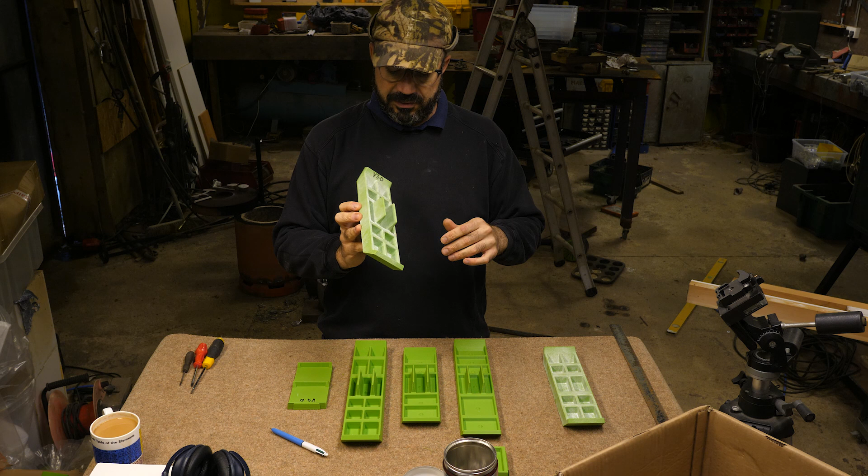I'll show you that in a sec. But just a tiny recap. So the last thing you saw was me casting version 3. If you remember, it was pretty nice, but there was a bow and I was trying to get rid of that.

It had finally dawned on me that these ribs were really just for the PLA model and not the aluminium part. So after that video, I started to think in terms of reducing the ribs altogether, particularly these ones. Do you remember I was going to make these thinner as well, like the version before was? I was going to try and reduce the height of everything.

I really just wanted to almost get rid of everything and just get down to a flat plate, because that would help a lot with the bowing aspect of it. So I went straight to version 4, which actually sits here.

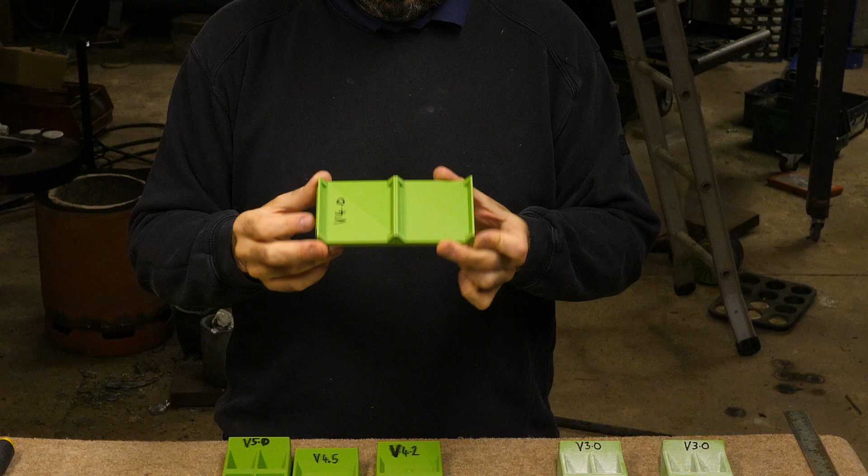Now version 4 is essentially a flat plate, and I redesigned the tapered dovetails to be super small. They're only half the height of the tapered dovetails in this version. I was kind of pleased, I thought actually there's promise to this.

I printed some, and unfortunately when they go together you can see there's a significant bow at the join, and I think this is due to the dovetail being a little bit too small.

But I was thinking at the time that perhaps it's because these ribs here, I'd done away with them, and really the only thing stopping it bending this way was these tiny little 45 degrees here. So I binned that one and reprinted it with the same small dovetail, but with ribs in between.

It did help things significantly. As you can see, the bow is a lot less. It's still there though, and it was getting annoying now because I didn't really want to start with a pattern that had a bow in it.

Because then the very best I could hope for is a part that would have a bow in it, and I didn't want to rely on using force to bend things back into the right place. I just wanted to have a pattern that was straight and flat, much like these ones were. I was just trying to reduce this but get the same flatness.

And unfortunately version 4.2 didn't cut it, which was a real shame. So that led on to version 4.5, and that is essentially the same except taller again. And unfortunately it's still got a bow, and I was then starting to think, okay, it's the tapered dovetail, it's not the ribs.

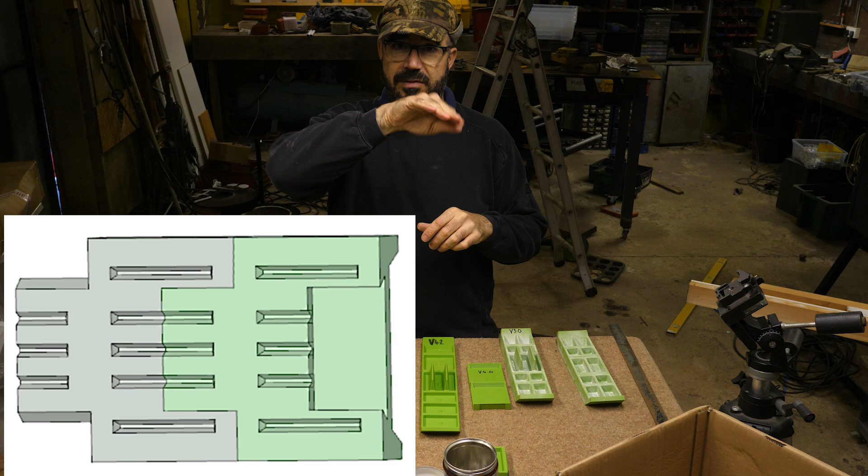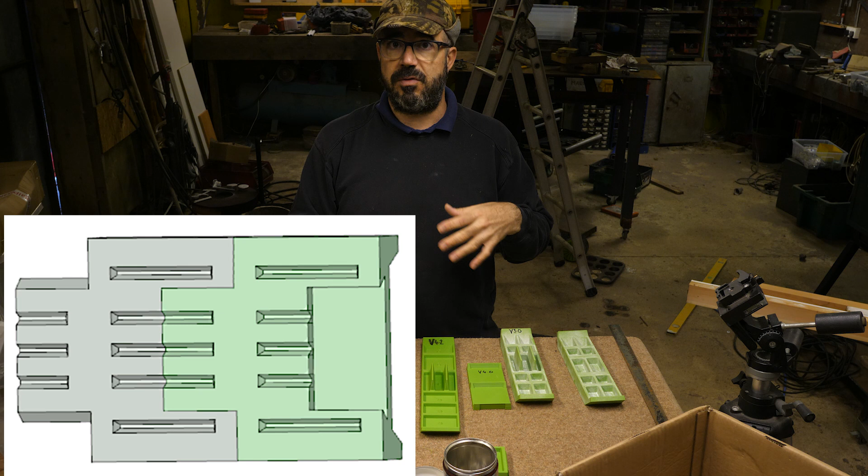I fired him back an email saying, this looks amazing, but it's got an overhang of 90 degrees. Essentially, the male slot has got a long shelf that has to be printed above the print bed, basically a large bridge, with nothing beneath it to support it. During this whole project, one of the major things I wanted to achieve was to make it easy to print. Because on the best of days, sometimes I have terrible prints come out of my printer, and I really want to avoid supports at all costs, which means avoiding 90-degree overhangs.

I basically said, that looks amazing, my one doubt is that 90-degree overhang. Leave it with me, I'll think about it for the next couple of days, and if we can get over that, this could be the new way forward.

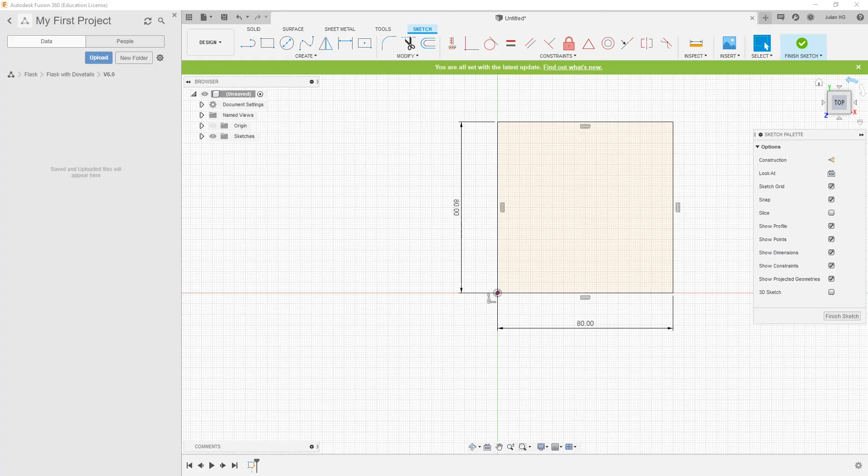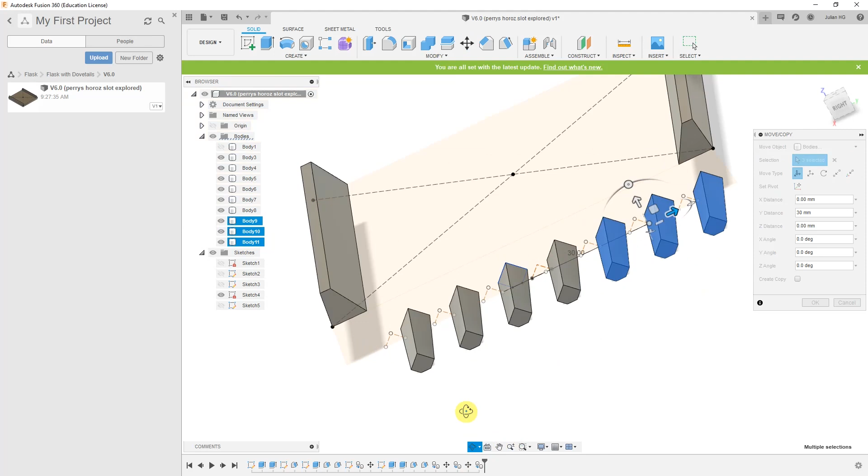Within 10 minutes, I basically sent him an email saying, I think I got it. My idea was to take Perry's idea, which was incredible, and split that long shelf. Instead of having one shelf going above another shelf, my idea was to split them into fingers, with the male fingers moving into the female fingers. But if I was cunning enough, I could make each finger based on a triangle with sides of 45 degrees, which is totally easy for a 3D printer to do.

It's when you get to 90 degrees or flat that the overhangs are a nightmare. Printing a triangle at 45 degrees is dead easy for a 3D printer because it's always printing onto the bit below it. It's just slightly off to the side, and as it goes, it just works its way up, and it's a perfect 45 degrees.

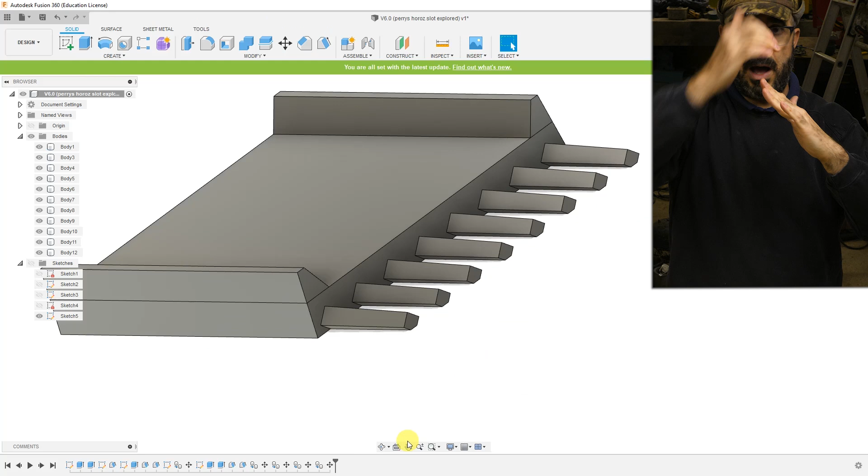So that was the new plan. I spent the next 4 hours feverishly designing. These fingers are based on triangles. They're actually kind of square in section, but they start thin and get wide, so that the 3D printer's always got something stuck on the bed.

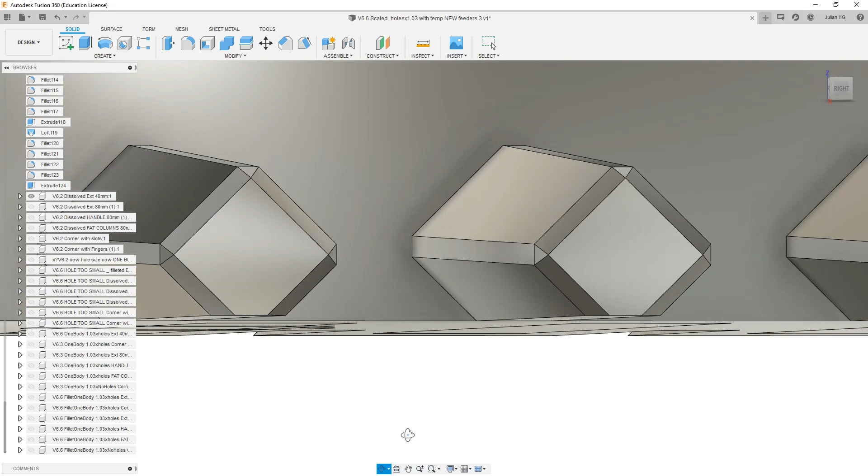With that square shape on its end, a kind of diamond shape, this side, the female side, is also printed with a 45-degree overhang as well. Nothing over 45 - I think it might go to about 47 when I include certain things I'll talk about in a minute, but it's nothing like 90. 90 has to be avoided at all costs. I'll show you these in close-up because they're kind of neat.

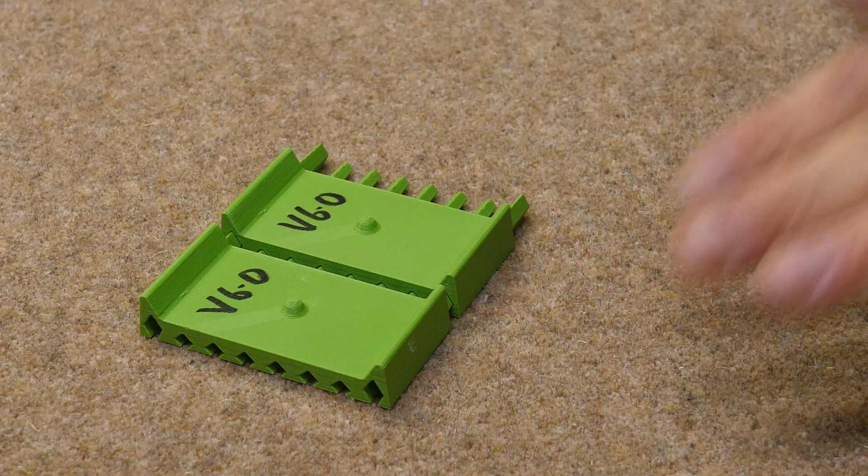So this was my first take on Perry's slot idea. Instead of the slot along the bottom, all I've done essentially is remove half the slot in vertical segments and then change the shape of each slot, and on the other side have the fingers fitting into a female version of the fingers.

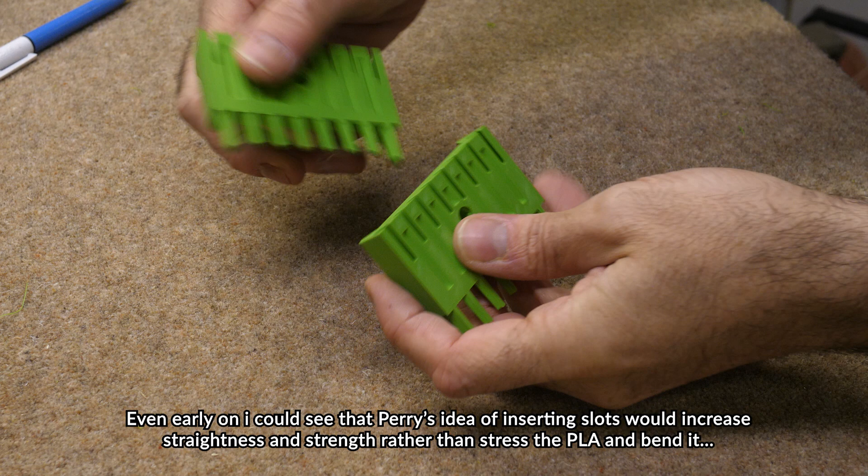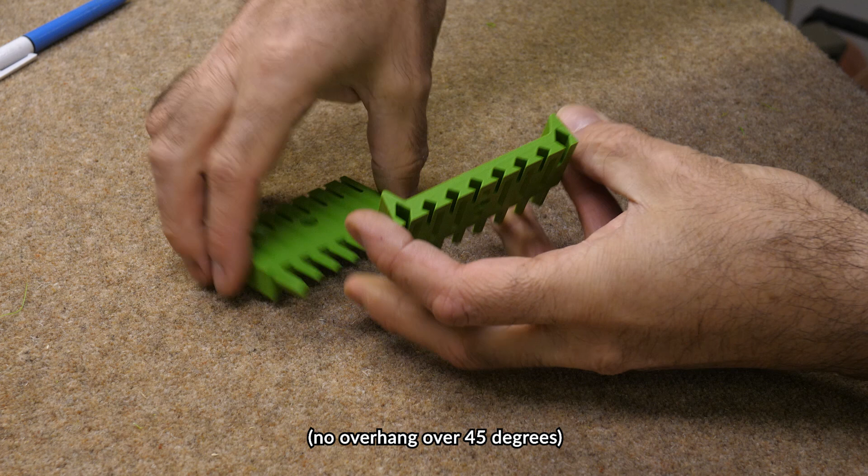Now, as you can see, if you look underneath, both the hole parts and the finger parts always start on the print bed. There is no part with an overhang, and when I first got these off the printer, I was so super excited. I was emailing Perry going, oh my God, Perry, if this works, this could be incredible. And I put them together.

At the moment, this hole is exactly the same size as these fingers. Bear in mind that I printed this at 0.2 millimeters in fast mode, so that is the least accurate setting my printer can go. There is one setting worse, but I never use it unless I'm in a massive rush and tolerances don't matter. But tolerances do matter with this. Oh, one other thing I forgot to mention.

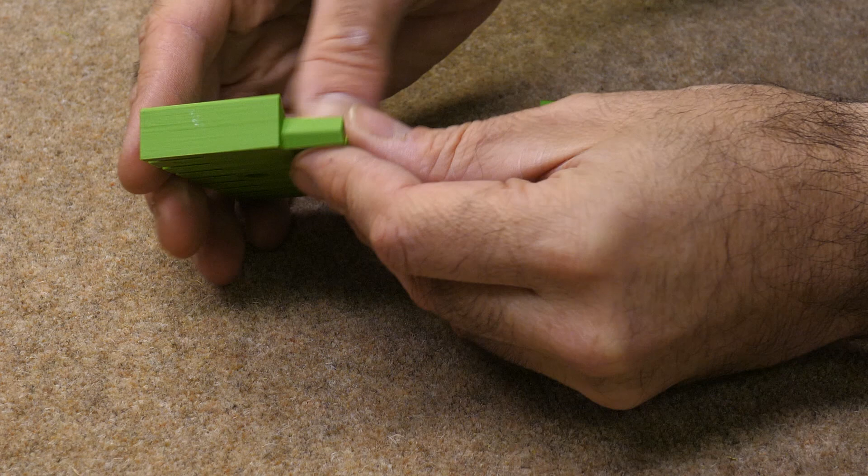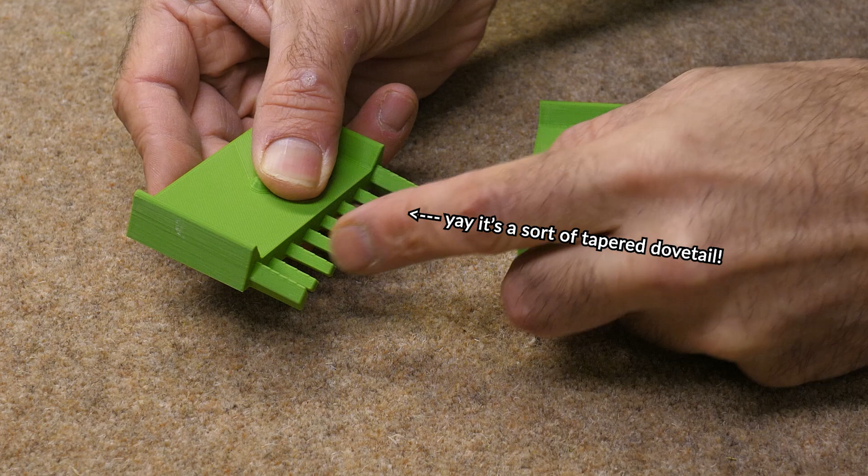It isn't just a basic diamond or square. If you look side on, it's flat along the bottom because it has to be on the print bed, but I've tapered it along the top surface. I've actually put draft on the top two surfaces.

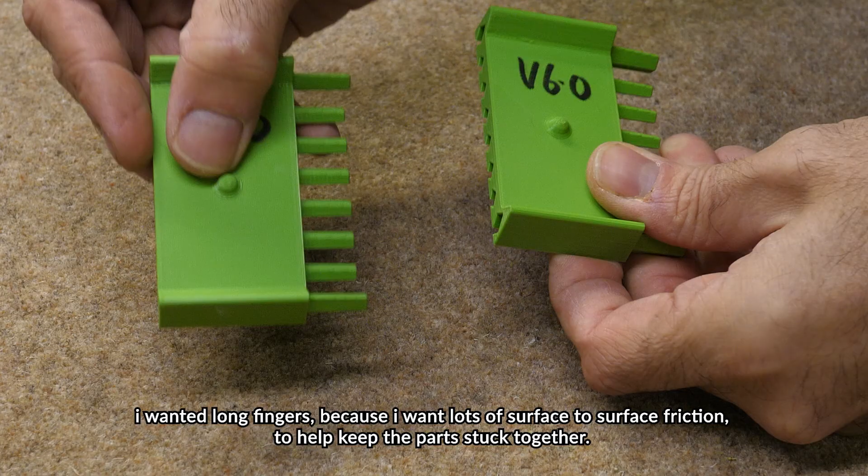The bottom two surfaces are exactly 45s, but the top two surfaces are tapered down, and that way it's not a firm fit until you actually get the parts fairly close together, because I was worried that because the fingers are fairly long they would snap off inside the other part and it would be a nightmare to separate. So I made the wedge in order to circumvent that.

Anyway, so I got them off the print bed, put them together, and was ready for a little celebration.

So I'm pushing pretty hard there. I don't want to push with all my strength because I'll never separate them. But as you can see, there's a 3mm gap. So that's not great. But if you look down, they are absolutely dead straight. So I was well chuffed. This could be the new way forward.

And I was thinking, wow, this is pretty amazing. Lovely and straight down there. But you may not notice on camera, there's a very slight thing you may not see.

This piece here, the male piece, is on a slightly different level to the female piece. The male piece is like 0.1 of a millimeter above the female piece. And that is because of the way they're printed - these holes, the bottoms of the holes are just slightly too small. I think it's all to do with the first layer squishing, it's called the elephant foot effect.

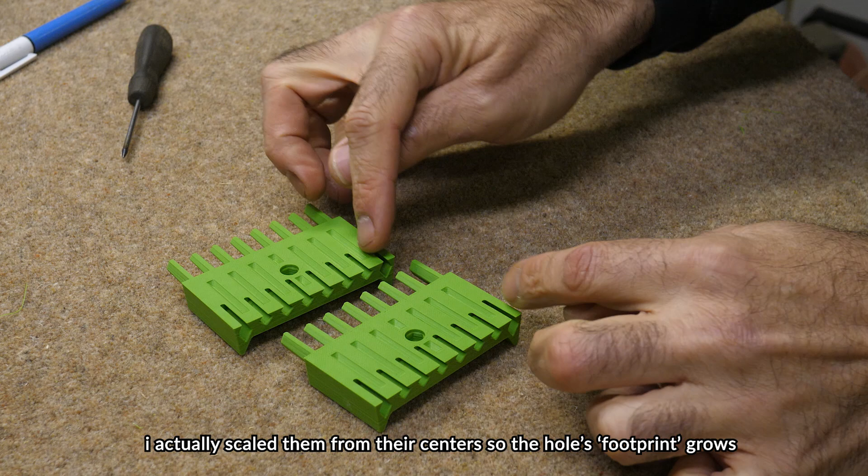But what I had to do was make these holes bigger. All I did was scale the holes by 5% and made them bigger. So I kept the male parts the same, but the female holes I scaled 5% bigger. And then I did a reprint.

And that's what this is. But it's nearly perfect - I mean, I say nearly, it is perfect, but I would call that a tiny bit too loose. I wanted them to hold together a little bit more firmly. So I redid it again, but instead of a 5% increase in the hole, I went to a 3% increase in the hole. And that is where we're at now.

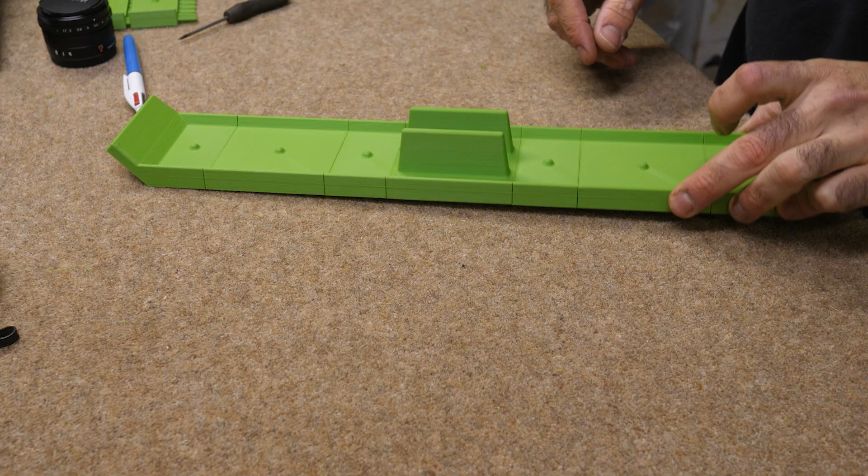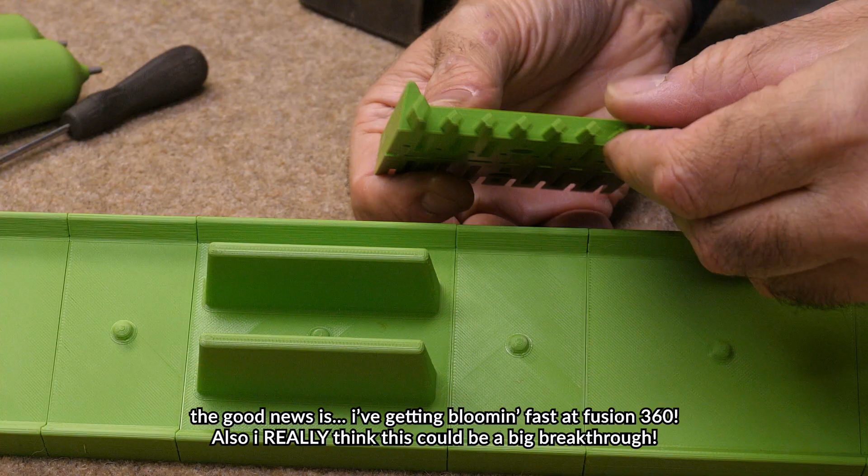Because of that amazing photo that Perry sent me, and the subsequent complete redesign of the whole thing with the slot turning into fingers, it's essentially the same, except instead of one big slot that has got a 90-degree overhang, which I didn't want to do because of printing problems, I turned it into 8 fingers, which will all print really well because they're all on the print bed.

Equally, 8 holes, which will also print well because they're all supported on the print bed. And because of that idea, essentially, we've done away with these fat columns that were having to house the tapered dovetail. And I think those fat columns were the ones causing it to bend.

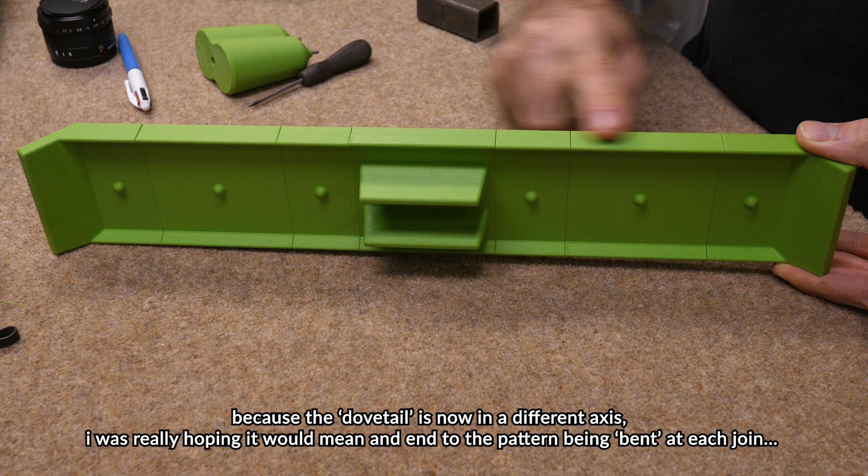It may well be that these ribs cause a problem. I like the idea of having a largish flat surface here for your kind of striking tool to rest on. There is taper there, it's 7 degrees. And again, I've gone with 7 degrees taper on the handle.

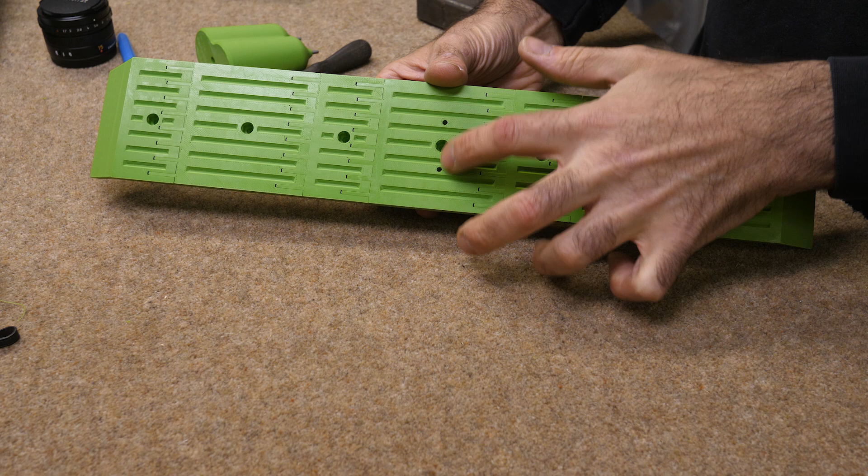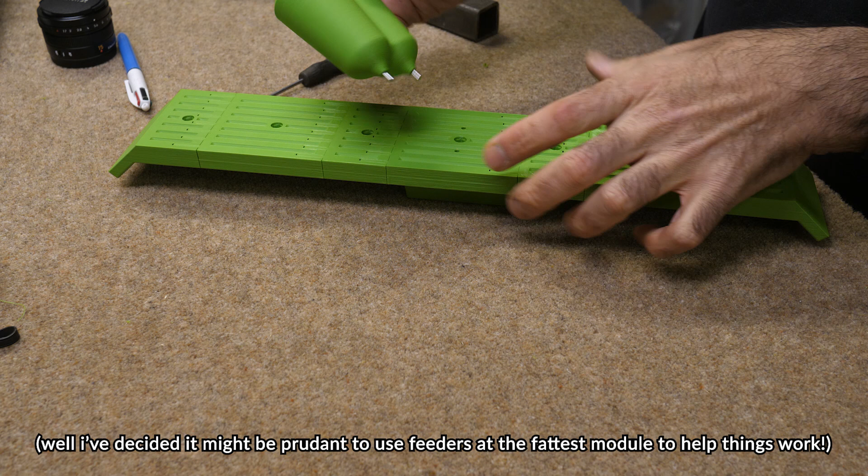You can see the bumps where the captive nut holes are. There's also, I've added on these 2 handle pieces, because I'm trying to use feeders now, I've added 2 little pinholes which will line up with this feeder pattern, and that will fit in there.

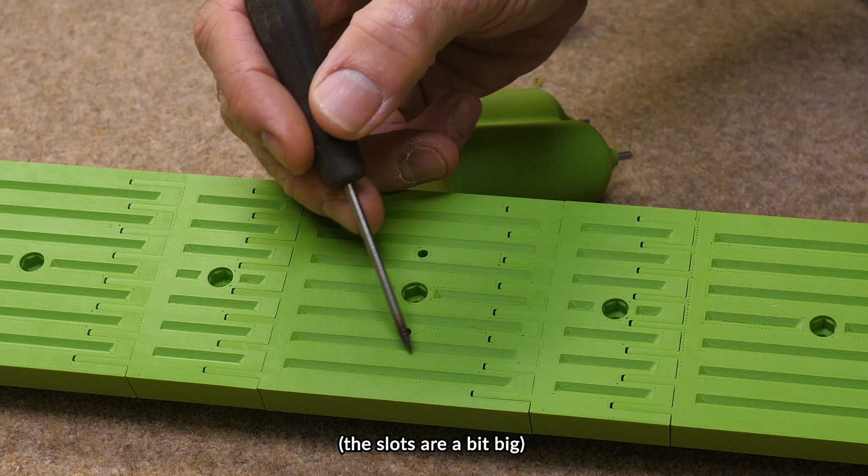Now unfortunately, because I've reused the slots from previous prototypes, they might be a bit big. Well, they are, in the way I've laid them out here. I may actually have to do what I did with these little nut holes and end the slots early, so that at the moment this flat piece here is too small, I think.

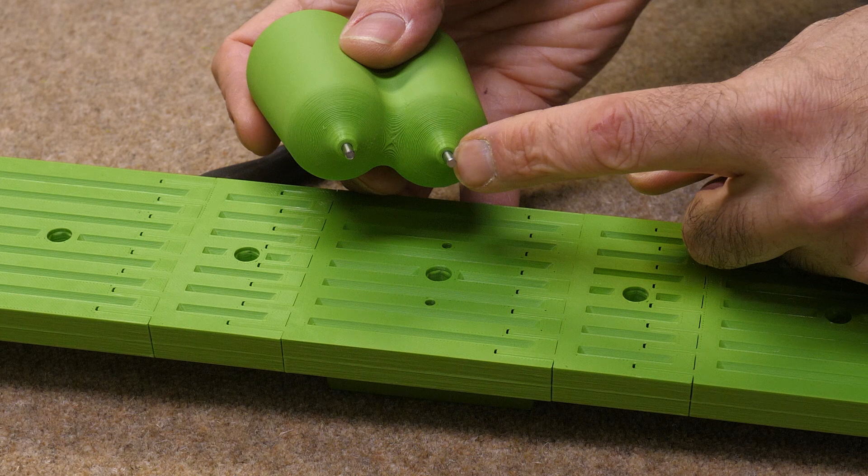The largest I can make that little feeder gate is only 6mm because of these slots on either side. If this has promise when I first cast it, then I will make these slots smaller in this area, and that way I can make the feeder gates larger if needed.

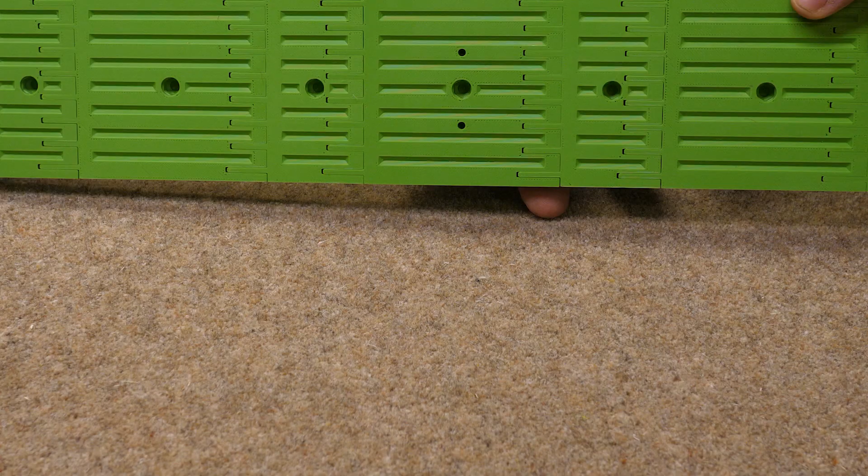So that's the standard handle module with its associated feeder part. Now, do you remember before, I've also made a module, like on the previous versions, that was based on one extension piece but with 2 fat columns on it.

Let me use this as a way of showing you how easy it is to dismantle the parts and reassemble them. So you have to be a little bit more gentle. It's slightly less positive than the tapered dovetails, but nonetheless, it is perfectly doable. So there we go, I took that one out. Let's put that one in.

There we go, so that's the fat column module put in instead of the other handle. And as you can see, it is dead flat still.

This is the module I was thinking would be useful if you wanted to make your own handle design and just bolt it straight onto this module. These fat columns give you a nice place to drill through. You could put screw threads in it or just bolt all the way through to the back. It's a bit more beefy and a bit stronger.

But because they're fat columns, and previously the fat columns have caused us bending issues, I put two little feeder alignment holes right in the middle of these columns. And here's another double feeder unit that will just fit on top of that.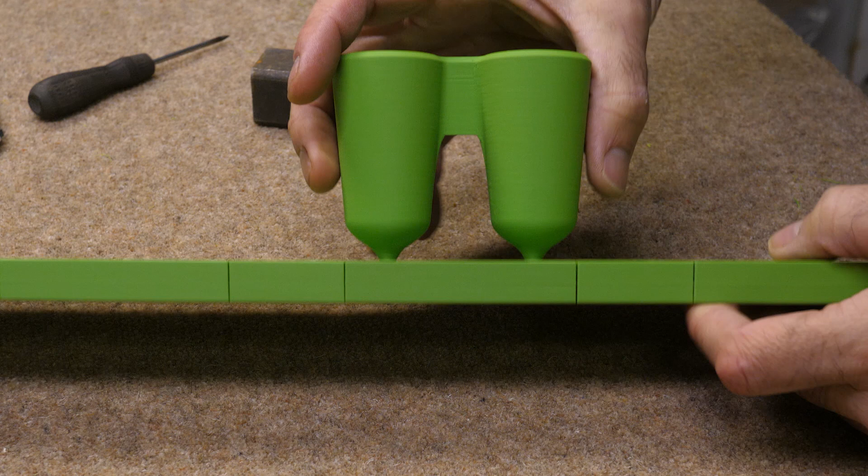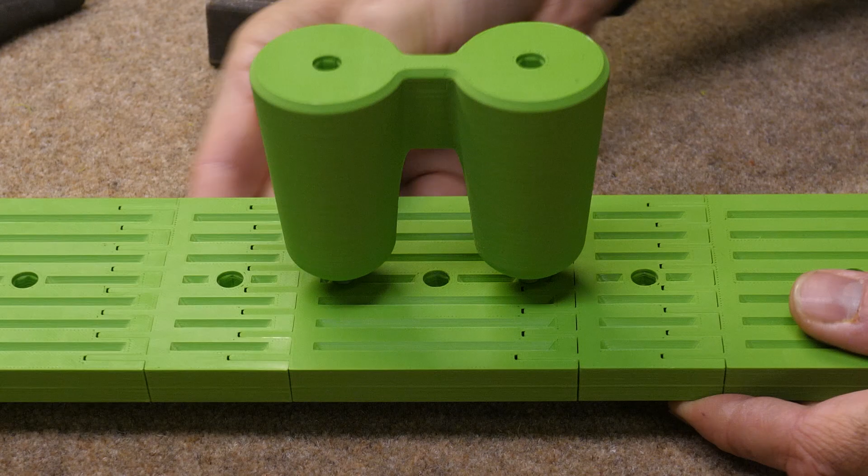But again, the gate is probably a little small, but we're going to go for it this time around. So that's where we're at.

Oh, another bit of news. Late last night, I was in bed, actually waiting for these to finish printing, and I had an email from Wargrade, another casting channel, Andy, and he's a great guy. He sent me an email about these flasks and said, don't be frightened of going thin. And I think I'm with him on that.

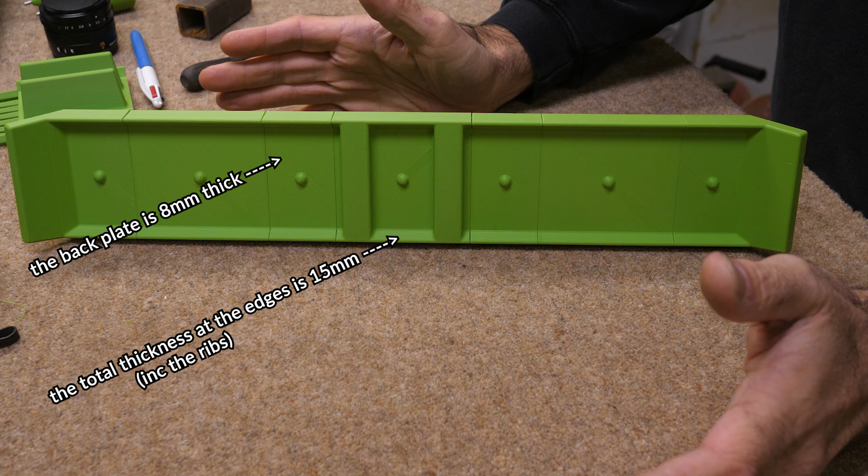This plate is 8mm thick at the moment with these ribs. It may well be, if this casts well - bear in mind this kind of ridge here may cause us problems with bending - but assuming it isn't, we could reduce the height even further.

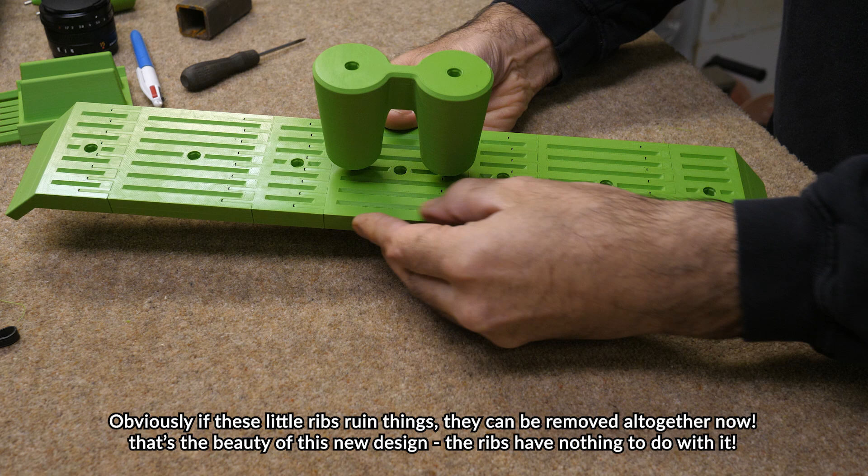Now I went with 8mm because I'm still using 4mm grooves in the bottom here, and I didn't want to go too thin without changing the grooves. I just didn't want to change everything all at once. So I went with 8 to start with, but that gives 8mm for the wings, which is probably thin enough.

Probably don't want to go too much thinner with the wings, but we'll see, because I might need a little bit of allowance to do some sanding once the parts are together, and if they're super thin, you won't be able to take off much with a sander.

Oh, and one other thing Wargrade said - then I scrolled to the bottom of the email and saw this photo. And as you can see, potentially, that is an awesome idea.

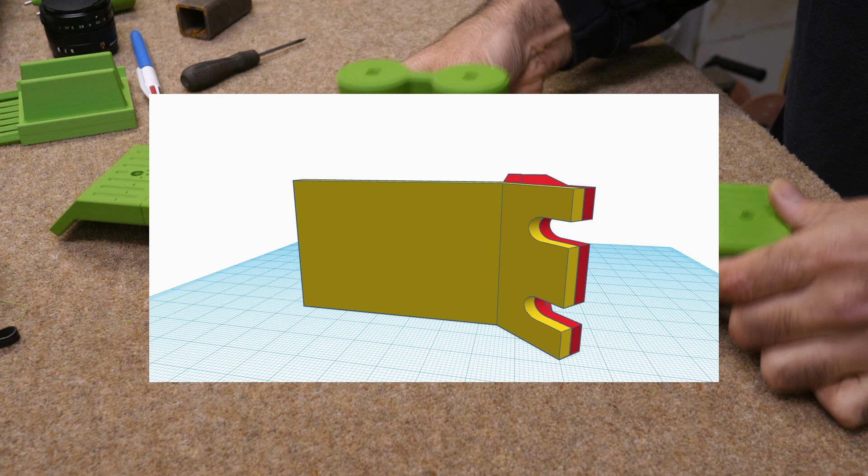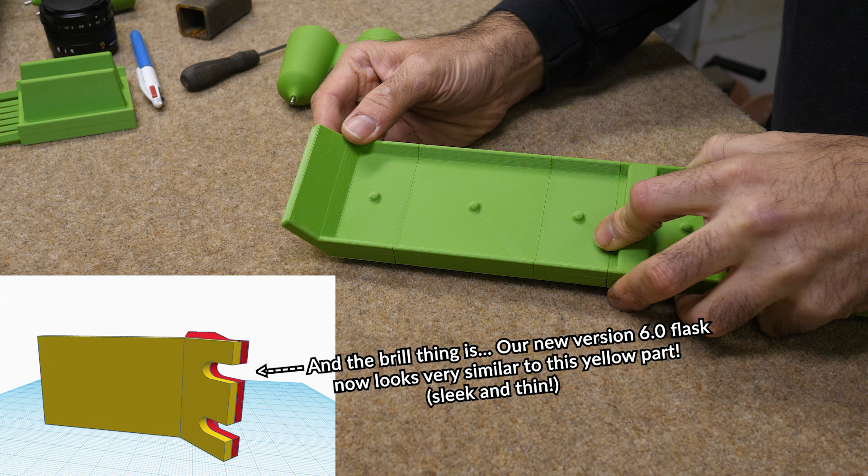I think if I can somehow automatically cast in sort of slots on the edges of these wings, that might be a nice time-saving idea.

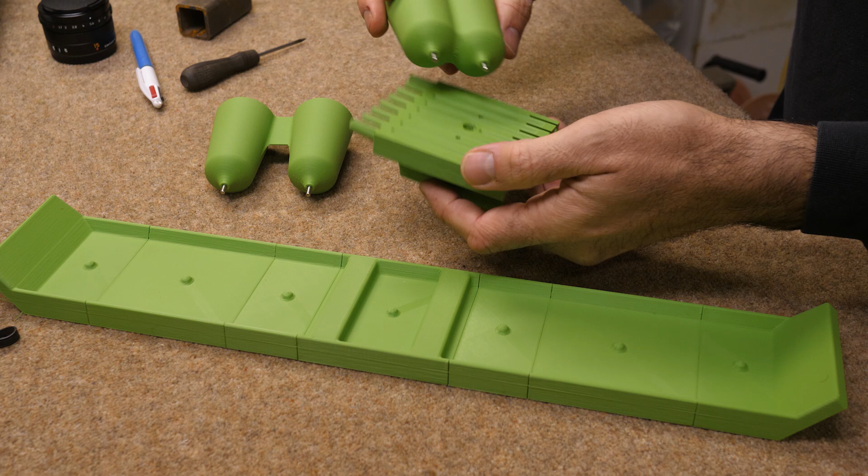I'm going to go with this first. I'll probably cast - I'm actually printing a few more bits now on the printer - and by the time I do some casting, which might be in the next couple of days, I'll hopefully have enough to do a small side with this module in the middle, and alongside another small side with this in the middle. So I'll be able to do two, and try out both feeder styles. So you got this one and this one.

Yeah, and that's where we're at now. So there are plenty of new avenues to explore. You guys, as per usual, are coming up with the goods. This one mainly is about Perry and Wargrade, but if it hadn't been for every other suggestion before that, we wouldn't have got this far. So you're all awesome, as per usual.

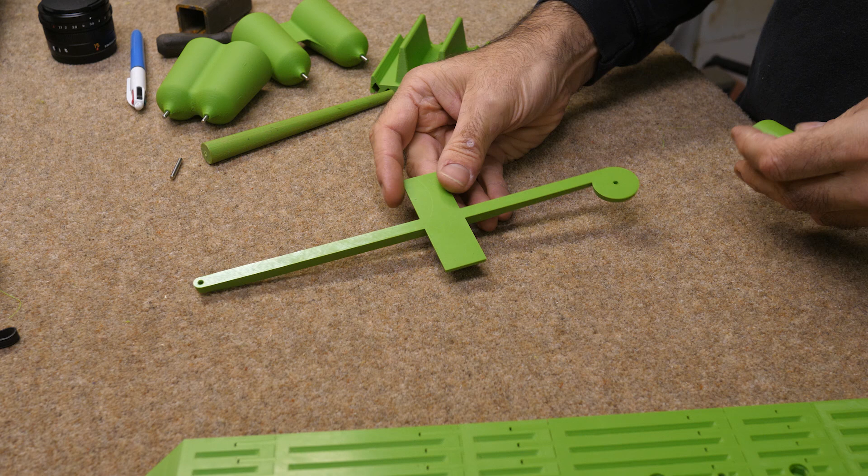Oh, talking of Perry again, I finally got off my backside and printed one of these spin trap doodads that Perry's always using. I had a chat with him last week about it on Google Hangouts, and he showed me, sent me his little model, and I based it on that - just slightly longer because I've got a longer pattern.

And this bit comes off, and this end piece is based on the end of my sprue here. When I sort the drag out, this will be the table, and I'll put my patterns in like that - let's just pretend for a moment that I've got another pattern there. I'm doing two. I'll put this in the middle.

And then I'll put the drag on, ram it up with sand, and then when I flip it over, it'll essentially be like that in the top of the sand. And then I will put this piece on there.

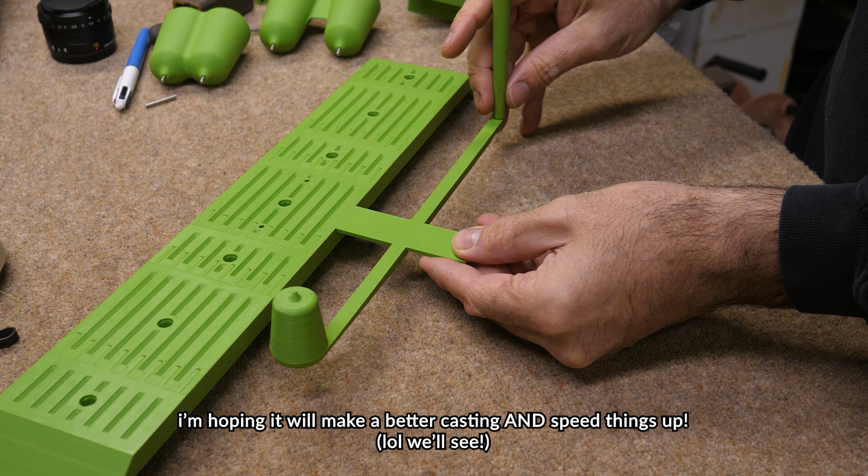And then I'll put the tapered sprue. I've drilled a little hole, actually quite badly. I've split my sprue there, but I've glued it back together. And I'll take one of these little things and pop the sprue in there, and then I'll fill up the cope with sand, and hopefully that'll give me a lovely tapered sprue with a spin trap and nice wide, cool gates. I'm trying to keep the heat to a minimum in this area, but we'll see.

I'm just super excited as per usual. You guys have come up with the goods. It's just brilliant. I'm just loving this whole process. So at the moment, this is where we're at.

I just thought I'd do a little update because you guys are still emailing me great ideas, but they're kind of based on my last video, which was like 5 iterations ago, because I can't keep up with the video making. Making a video takes so long that it's easier for me to do a quick update now and show you all the steps in one go rather than make a video with each update, if you see what I mean.

But this is where we are at right now. I'm essentially going to hope to publish this video before I do the casting, so you guys are fully up to date now. And yeah, I'm super excited.

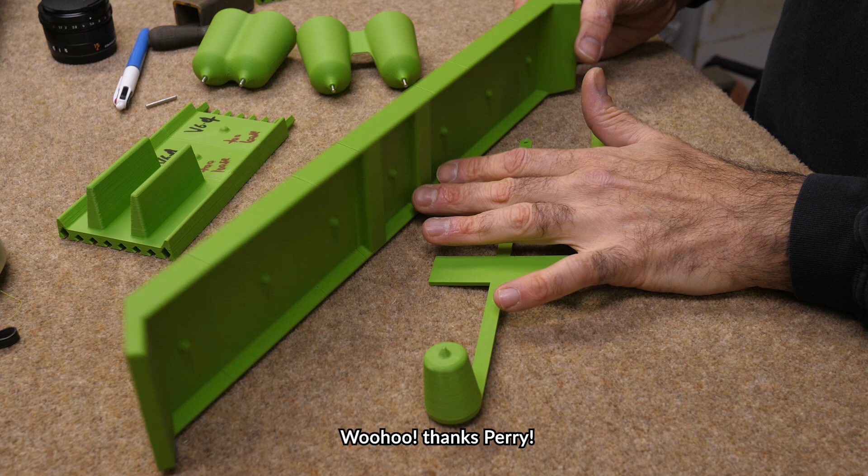This is the best of both worlds now. I've taken Perry's idea of the one dovetail, but laid horizontally, not vertically like the last one. And all I've done is take Perry's idea and split it into 8, which makes sure we can print it without any supports. Because of that idea, I really feel like this could be the end of the road almost. One other thing I love about this idea is because it's flat, it's kind of expandable in any dimension without it affecting the casting too much, I think.

Before, when I had loads of ribs, if you expand, I couldn't just double the height to make a super deep flask. Some of you guys want flasks that are 4 inches deep, 100 millimeters - I mean this is 80. Some might want one that's 160 deep, which is super wide. I think this could literally be almost doubled up, and maybe forget that rib there and just split it and stretch it, having a rib at the top and the bottom. We'll see about the ribs.

Aesthetically, I love the idea of the rib, and it gives a little bit more strength, but if it affects the straightness on the cooling, we might have to think again about that. Anyway, I'm going to stop yapping. I bet this is a really long video - I didn't want it to be. But yeah, that's where we're at now.

We've got a new take on the tapered dovetail. It's super flat. I'm going to try one of these little doodads - I'm excited to try this. And for the first time, I've got lovely pin-aligned feeders. It's just brilliant, all this new exciting stuff I'm doing, all because I just fancied making a metal flask.

And I love that this still means that the modules are what it's all about. You could make your flask as long as you like with the way this is going. I'm super excited.